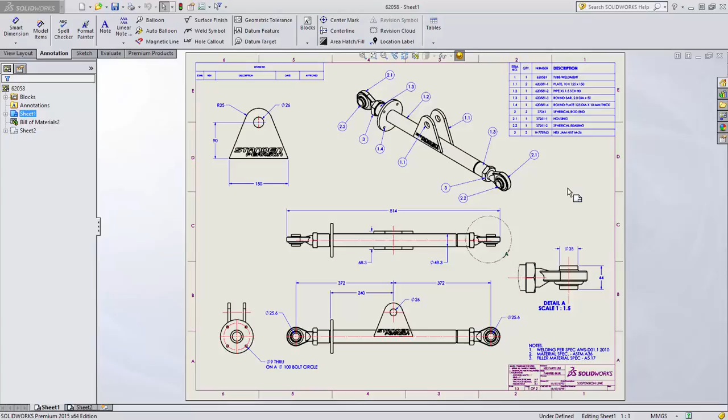Drawings are still important for many SOLIDWORKS customers, and with SOLIDWORKS 2015, we continue to add more functionality to meet their needs. When working with notes and balloons, a new leader type is available, the spline leader, and of course, these are fully editable. These leaders are especially useful for patent drawings or for just pointing to that tough-to-reach part.

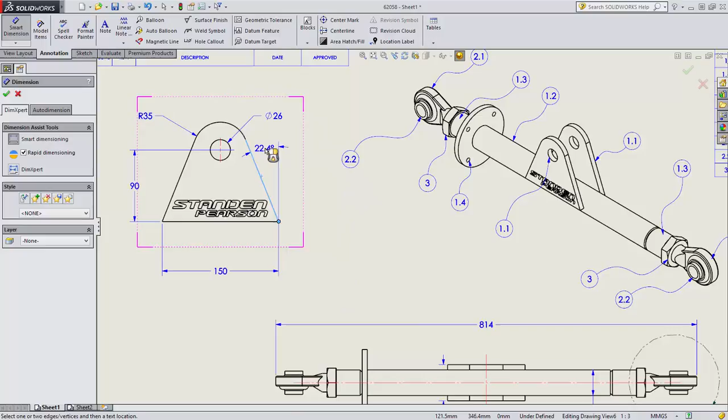When adding an angle dimension, it's no longer necessary to create construction geometry. A manipulator is presented, and you can select one of the legs to aid in the creation of the dimension. And after placement, if you don't like the position of the dimension, there are new options to display the explementary angle or to place the dimension as a vertically opposite angle.

The process of adding revisions has been streamlined. A new button is available directly on the revision table to add a new row. This adds a new row, the revision letter and date, and then takes you directly to place the revision symbol. After placing the symbol, you can see that the revision table now identifies the zone where the symbol is placed. If a revision symbol is moved to a different zone, the revision table updates.

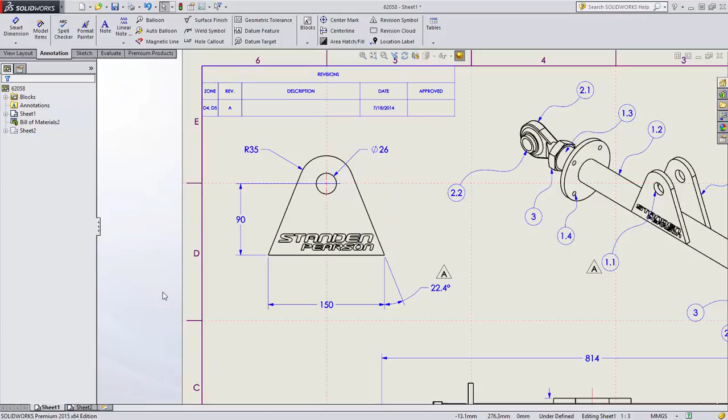This zone identifier is derived from the new drawing zones, for example, D5. The zone lines are created in the sheet format and can be viewed on the drawing. Zones can also be used in location labels to provide the sheet and zone for the parent or child view. And if the view is moved, the location label updates.

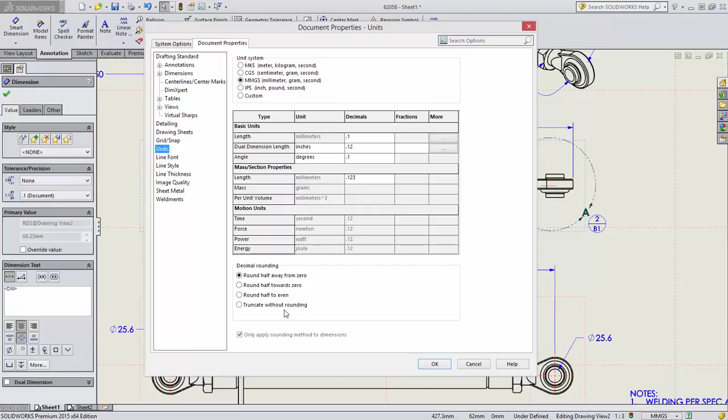Users wanting to have more control over the way that numbers are rounded will be happy with the new decimal rounding options. With SOLIDWORKS 2015, we can now round half away from 0, half towards 0, half to even, or truncate without rounding. Let's set this drawing to round half to even.

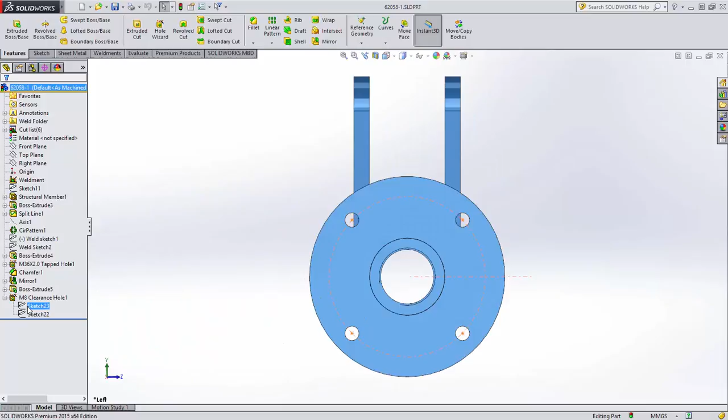That's perfect. This detail view has this nice center mark set, but when changes are made, these center marks can go dangling. Let's take a look. A new option on the context toolbar is to open the model in position. This is a big time saver to get the part oriented exactly as you saw it in the drawing, and it even works when opening a model from an assembly, which is very useful for symmetric parts to know which side is up. Let's delete a point from this Hole Wizard pattern and add two new ones.

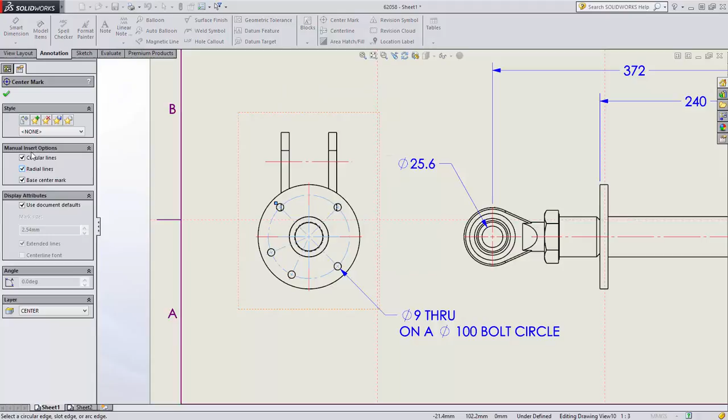When we go back to the drawing, you can see that there is a dangling center mark. This can now easily be reattached to a new hole, and there's a new option to add new center marks to the set. Let's check the option to have radial lines, and you can see that they all behave as one set.

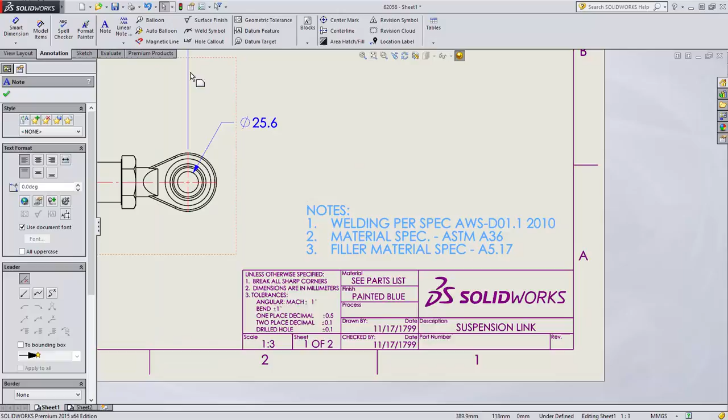Sometimes you may have sensitive information on a drawing that you don't want to get in the wrong hands. Let's place this note on the security layer, and as we access the layer properties, you can see that there's now a new option which controls the printing of each layer. The security layer is set to not print. Now when we look at a print preview of this drawing, you can see that the notes will not be printed and our secrets are safe.

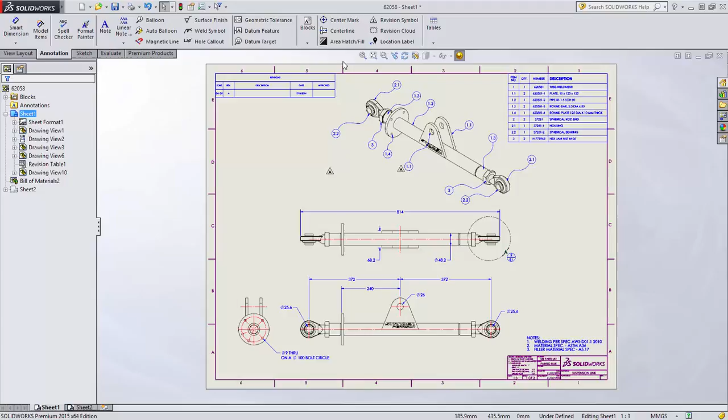Sometimes it's necessary to move views off of the sheet, or view bounding boxes go outside of the drawing border. When you zoom to fit, SOLIDWORKS does just that and includes everything in the zoom. A new command has been added to zoom to sheet, and this allows you to see just the extents of the drawing border. Creating quality production drawings is easier than ever with SOLIDWORKS 2015.